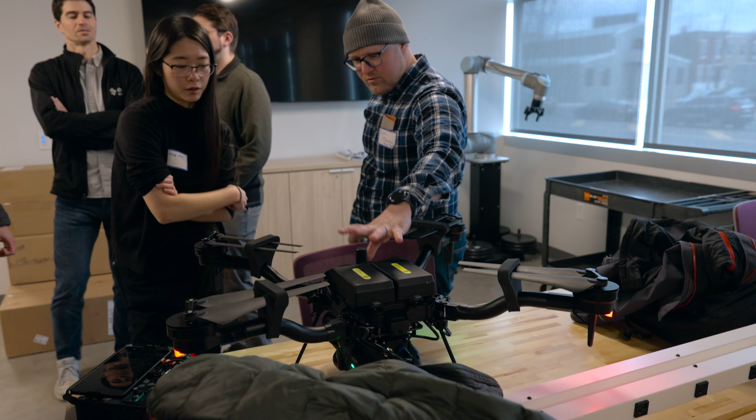My name is Spencer. I'm a PhD student here at the GRASP lab. And today I'm going to give you a brief overview of some of the research I've been doing for my thesis over the past couple of years.

And I'm going to start off my talk, if it goes to the next slide, talking about flying cars, because I think that's an exciting thing. I think a lot of people growing up, they dream to have their own personal flying car. And American pop culture has been obsessed about flying cars for decades now, pretty much since the invention of cars

and airplanes. It's 2025 now, and I didn't check today, but I'm pretty sure we don't have flying cars. But I will say, we've never been closer to having this dream of flying cars and being able to fly from your home to your job in the city and back, no traffic whatsoever.

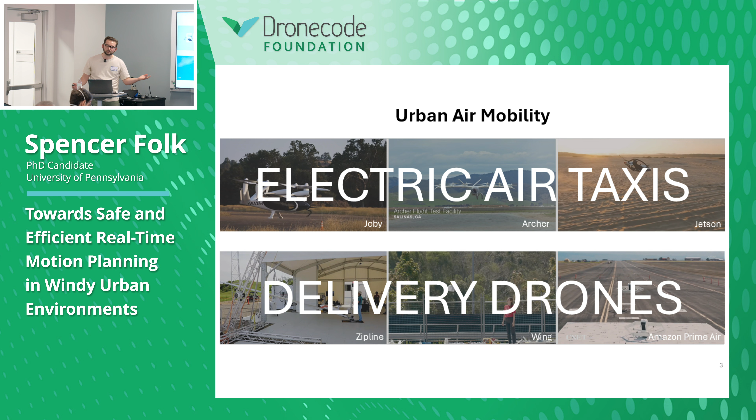We've got a lot of exciting companies that are working on reinventing the helicopter, essentially, developing these personalized aerial vehicles that promise to be quieter, safer, easier to use, etc. On the other side of things, we've got a lot of drone companies that are actually piggybacking off of the success of platforms like PX4 to develop autonomy for package delivery, for instance, flying packages from one location to another.

But I really think that the elephant in the room here, something that's really going to be a problem in the next 10 to 15 years, is urban wind. The fact that you have all of these skyscrapers, buildings, bridges, these bluff bodies that are interacting with the atmospheric boundary layer, is going to create a lot of very complex flows that, frankly, I don't think any urban air mobility or package delivery drone company is trying to attack right now.

And that makes sense. They're just trying to get their prototype in the air. But I think as we try to introduce these prototypes into our nation's airspaces, one of the biggest challenges in my mind is going to be these urban wind phenomena.

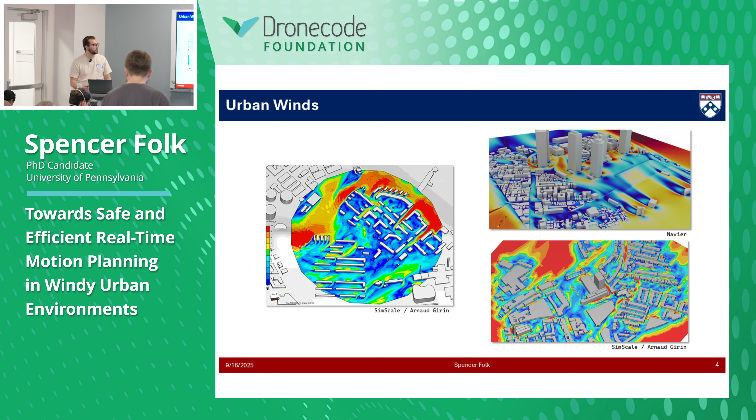So the problem that I'm trying to address with my thesis work is wind. Wind is a clear danger for these autonomous aerial operations in dense urban environments. And I believe that urban air vehicles, in order to be successful and safe, need to be able to perceive the wind and make proactive decisions in order to avoid these dangerous and costly wind conditions.

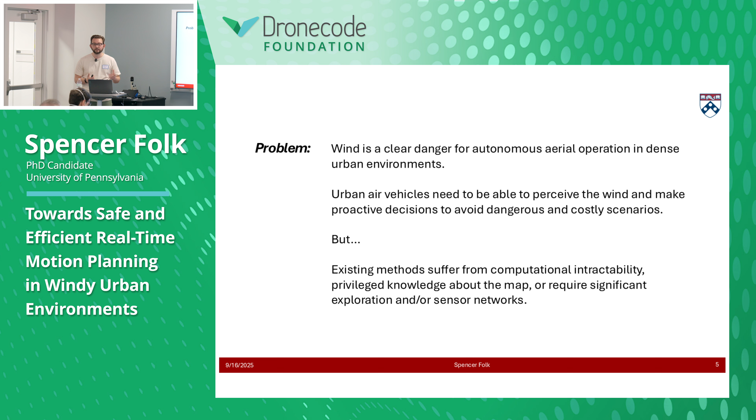However, as I'll show very briefly, a lot of existing methods that try to solve this problem suffer from computational intractability, privileged knowledge about the map, or require significant amounts of exploration and/or sensor infrastructure in order to enable these methods.

So in my talk, I'm going to cover three chapters of my thesis in a way. I'm going to talk about a novel method for local wind prediction using navigational sensors. And then I'll talk about using that enhanced capability and enhanced situational awareness to enable safer and more energy efficient flight through urban environments.

And then last, I'll talk about our progress towards validating some of these ideas on actual hardware platforms. And the main focus with all of my work is developing methods that could, in theory, be applied in real time using onboard sensing. So I'm going to start by talking about some work on local wind prediction.

So the problem is, we've got this very complicated flow phenomena that, as I said, arises as that boundary layer interacts with all of these bluff body buildings in an urban environment. And the question is, how do we put together an accurate model of this flow? Because if we had an accurate prediction of what the wind would look like, that would kind of trivialize the problem in a sense. And so one brute force option is to do something like computational fluid dynamics,

where, this is pretty standard stuff, we're simulating the wind using existing numerical solvers and some sort of precise map of the environment. But this is very computationally expensive, and by the time you finish producing a solution, that solution might be old news. It might be wrong.

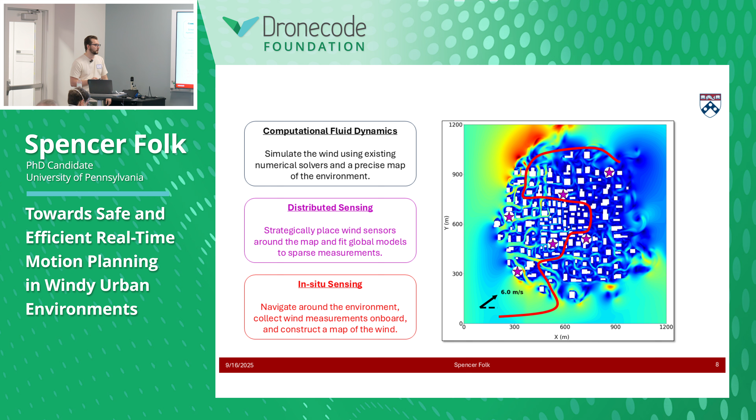So as I said, these existing methods rely on some mix of distributed sensing, in situ measurements from a mobile sensor, or a precise up-to-date map of the environment, which just might not be feasible. So what I'm working on is instead trying to reformulate the problem of predicting the entire flow field down to just predicting a smaller portion of the flow field that is centered at the robot's location. Because to be honest, the most important and most relevant information for flight at a given instant is what is the wind right around me, right? I don't necessarily care what the wind looks like 5 blocks away from me.

And so what we'll do, as I'll talk about in the next slide, is leverage these correlations that we observe between surrounding obstacles or topography signatures and the surrounding local flow field. And then because it's 2025, we're going to use deep learning to model these correlations.

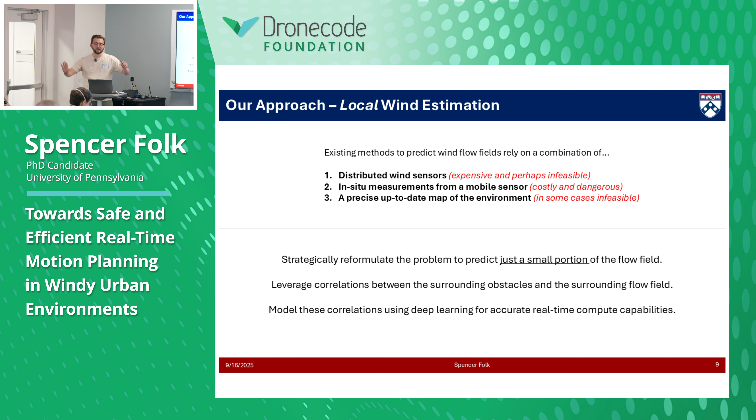Say again? AI. Yep, this is AI-enabled wind flow sensing is what the title should have been.

Okay, so this is a brief overview of our methodology. The inputs to our network are range measurements that you would get from a navigational LiDAR, some of which we've seen here today, and then some measurement of the wind flow field, either at the drone's location, which is this local wind vector, or some upstream wind vector, say from a weather station. This is kind of outdated. We threw out the upstream weather station requirement later because we discovered in an ablation study that it really wasn't providing much information to the network. So we can really just rely on a single measurement of the wind at the drone's location and a LiDAR scan of the environment at that instant.

And this is important to mention, the output of our network is not just a single wind speed vector at the drone's center of mass. That's already been done. What we're doing is outputting a flow field that's ego-centered at the robot at all times. So we're always trying to predict essentially on a grid that moves with the robot. And we're not just getting wind speed, we're getting X and Y components as well. And again, because it's 2025, we use AI to do this.

Now, the benefits of this over some of the other ideas I talked about a few slides ago is that at runtime, this is very computationally inexpensive, especially in the days where we can throw an NVIDIA Orin on any of these platforms. We get a lot of GPU compute, so having a neural network running on these vehicles is really cake. It also generalizes to unseen environments, and I'll explain why that's the case in the way we train these models. And it also requires no knowledge of the map, so you could go into a completely novel environment and have this method still run on board.

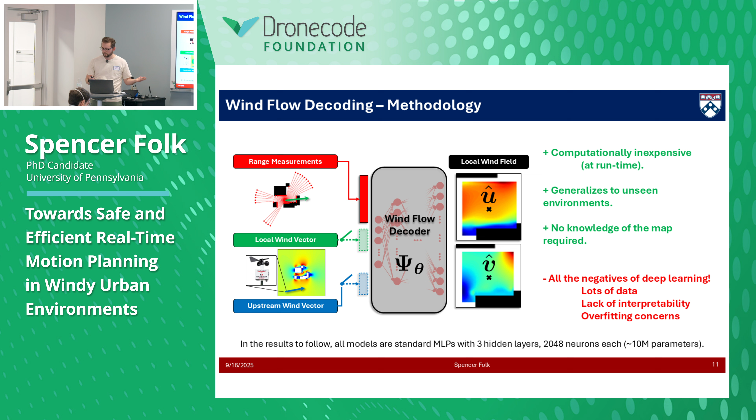As far as the negatives go, it's all of the negatives of deep learning. So we require a lot of data for our method to work. I'm not going to skirt around that. There's an inherent lack of interpretability for our method, and there's definitely concerns with overfitting to a particular map or a particular environment. And we try to do some things to avoid that.

But the way we train these models, again, starts with a lot of data. So we developed our own in-house fast computational fluid dynamics solver that would simulate thousands and thousands of wind flow patterns in completely procedurally generated cities. So this is like thispersondoesnotexist.com, but this city does not exist, right? These are all procedurally generated cities.

And for each of these simulations, we do dense sampling where we randomly position the simulated LiDAR sensor in the environment, collect a LiDAR scan to understand what the local topography looks like, as well as what the local wind and the local flow field look like. And then the rest is just supervised learning, so I'll crunch through that. We use supervised learning to train our models. And then again, we're talking about overfitting. We don't want to overfit our model to particular cities that are in the training data set.

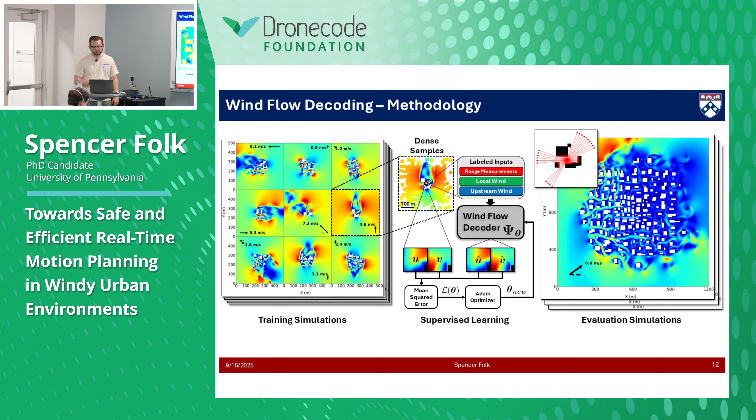So when we evaluate or validate our models, we're testing them on much larger and potentially different city environments that we're using to essentially monitor how the training process is going. And this is a pretty cool GIF of what it looks like for the model to train. So each frame here is a new epoch, or a run through of the entire training data set.

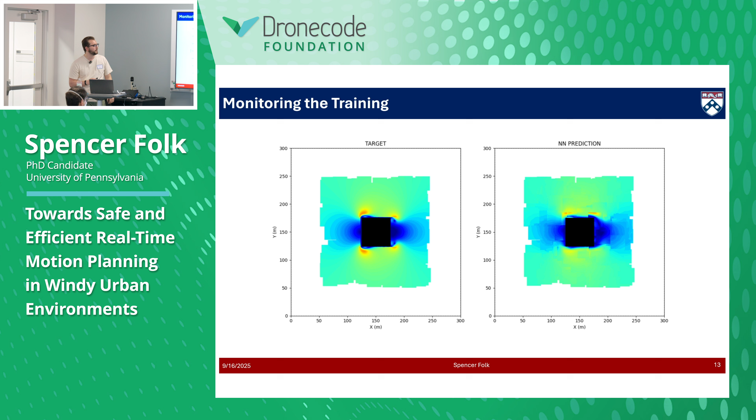And you can see at the very beginning, you just saw it for a frame, it was basically noise. But then it very quickly picks up on different symmetries of the flow. So again, this is flow coming left to right over a single building. And you can see that first it picks up on symmetries in the flow, and then it narrows in on some finer details like the corner accelerations as the flow wraps around the building.

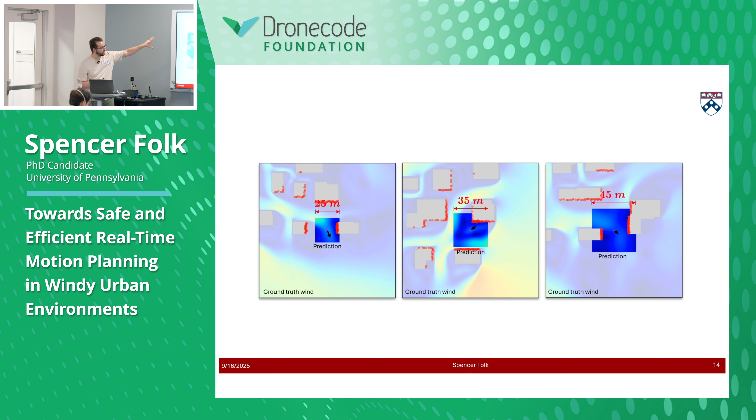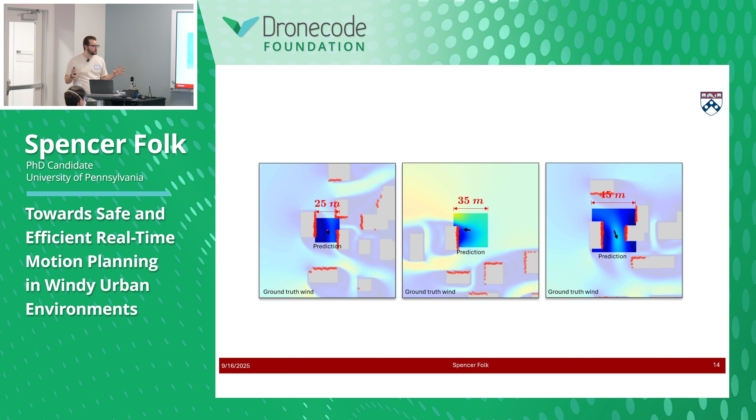And what we get out of this is a network. Here I'm showing 3 separate networks, each trained to predict a different size environment, that again is predicting the wind flow field, which you're seeing here in the small box in the center of each GIF, using only LiDAR sensing and local measurements. So that's the key innovation: we don't know anything about the environment going in. All we get is topography signatures from these red dots, which are LiDAR scans, and single measurements of the wind at the drone's location. And feasibly, this could be run in real time using existing compute resources. So that's our method for predicting the wind.

And now I'm going one step further and saying, how can we use this enhanced situational awareness to actually improve the safety and efficiency of these drone operations? So the problem is, again, I present you with another situation where you've got this nasty, complicated flow field that you're trying to navigate from point A to point B. And I'm proposing that you don't know what that environment looks like. Maybe it's a hostile environment. Maybe your Google Maps is outdated, but you don't know what that environment looks like, and you don't know what the wind flow field looks like.

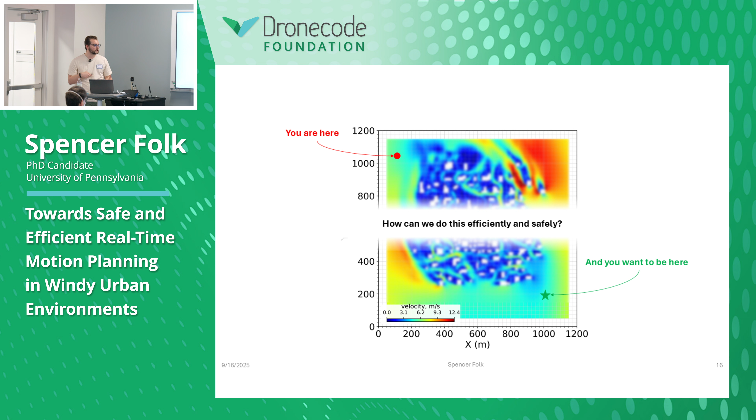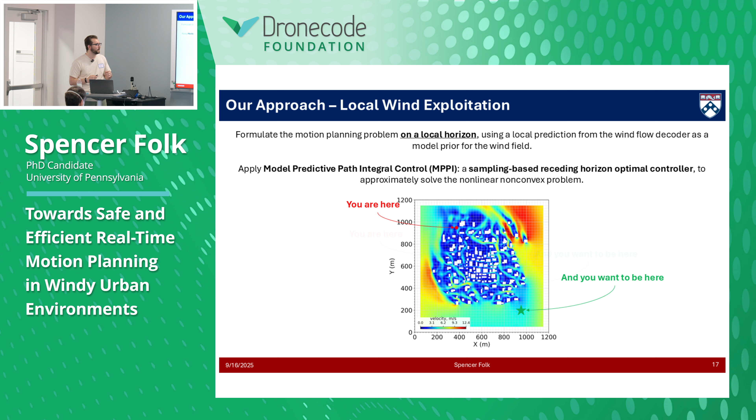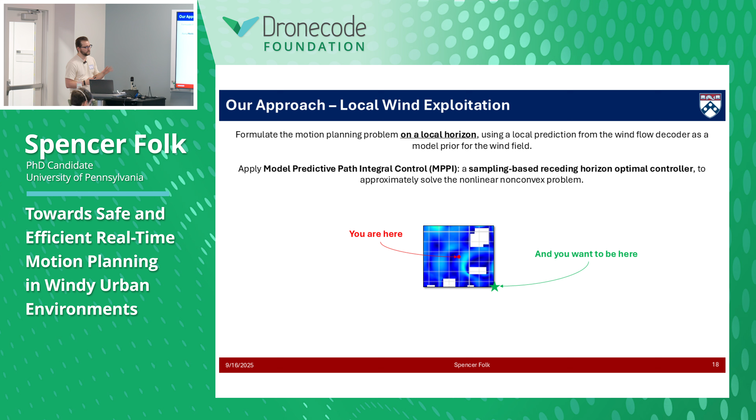So the question that I'm trying to address with this particular work is, how can we do this efficiently and safely? And so once again, in the same spirit as the first section of this talk, reformulating the problem from a global prediction to a local prediction, we are reformulating the problem from a global nonlinear trajectory optimization problem down to just a local trajectory optimization problem. This is still a very nonlinear, non-convex, nasty problem that is difficult to solve with off-the-shelf solvers. But we're able to leverage the fact that we have this new ability to predict the wind in this small box.

And this is an overview of our methodology. Essentially, we take a LiDAR scan and we feed it into this wind prediction module. And then once again, that gives us the flow vector field components in some box around the drone at all times. And we feed both the LiDAR scan and the wind prediction into a model predictive path integral controller, which is just a receding horizon MPC style control scheme that produces a higher level thrust vector command. And then that could be piped into whatever lower level controller, including PX4, that you have in order to get the control allocation to track that command as best as possible.

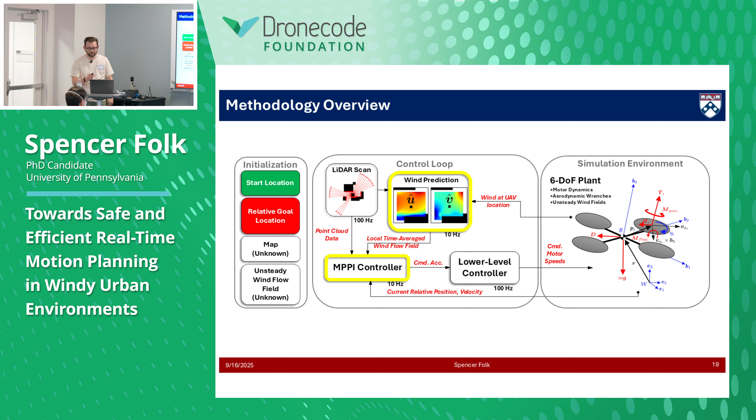But essentially the way we initialize our algorithm is we just give it a start location and some relative goal location, like navigate 100 meters downrange. And then we don't require knowledge about the map or any unsteady wind flow field. I want to highlight that on the right here, the simulated results that we generate are in a custom in-house simulator that we have in Python that simulates the full 6 degree of freedom plant of the model, including motor dynamics, aerodynamic wrenches, unsteady wind flow fields. So while I'm showing 2D results, and it is operating at a constant altitude, we are using a full 6 degree of freedom plant to generate these results.

And so you see 2 drones here. The magenta drone is just interested in getting from start to goal. It has no knowledge of the environment.

The black drone in this environment is aware of the flow field in the background, but only within that box around the drone, right? So it doesn't have any knowledge of what the wind looks like around it. And again, I'm using a sort of sampling-based receding horizon controller.

So at every time instance, it's essentially sampling a bunch of admissible control inputs, possible thrust vectors, over some time horizon, say like a minute into the future. And it uses those sampled inputs and a dynamics model to predict where the drone goes in that time horizon. And then it takes the next best action that minimizes some sort of cost function.

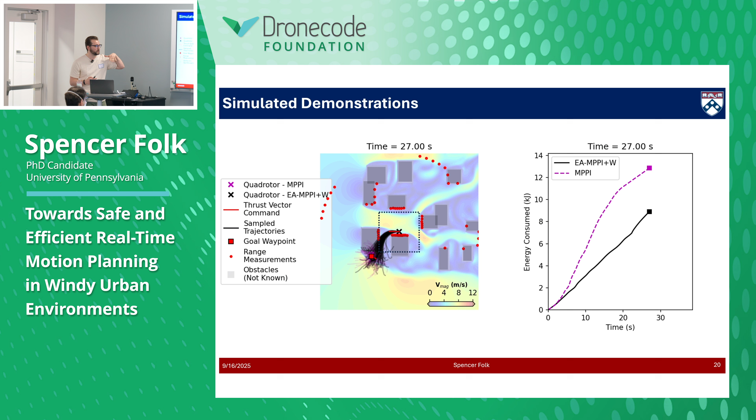And I just don't really have time to talk about what that cost function looks like today. But I'm happy to discuss details at a later date. On the right, you can see the energy consumption as a function of time. And you can see that the energy aware drone, the black line, consistently uses less energy over time.

We did some case studies, and we actually compared our method to a globally optimal graph search algorithm that's pretty popular in this literature. And so we did kind of canonical examples of flow around buildings, around an isolated building, an intersection environment, and then one of our evaluation maps. And I just want to zoom in on this.

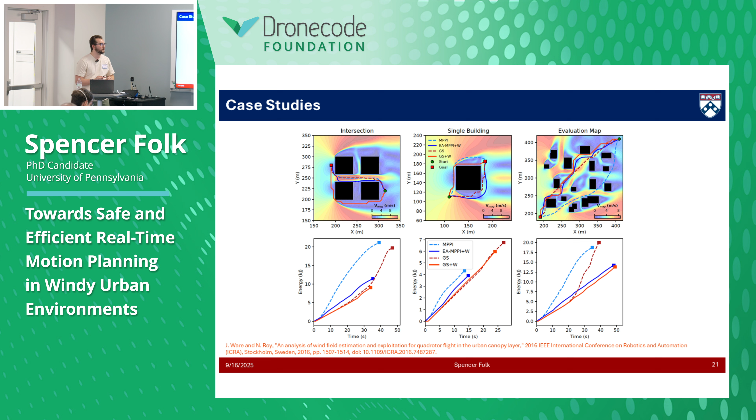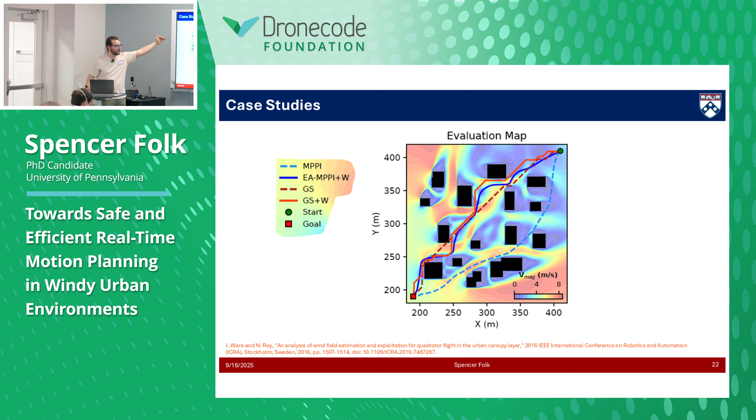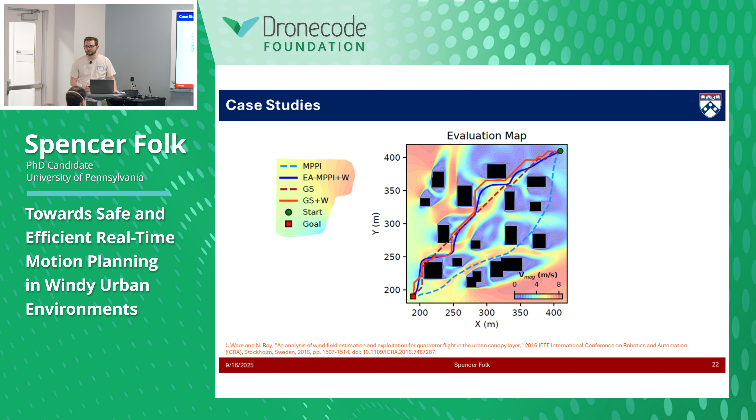So the orange lines here are the globally optimal solution. And the blue lines here, especially the blue solid line, is our local approximation of that solution. And so what we see in a lot of cases, not every case, but in a lot of cases, we get very similar paths traced out by our local optimizer that can, in theory, run in real time, versus the orange line, which takes 3 hours to run, right? Because it kind of checks every possible option over and over again. So that was all simulated stuff.

I want to now shift gears to talk about our more recent efforts to validate some of these ideas on actual hardware platforms. And for this, we're going to transport ourselves all the way from Pennovation, which is where we're currently at, to NASA's Ames Research Center, which is in Silicon Valley in California. And the reason for that will be apparent in the next slide.

But we're planning this set of experiments that unfortunately I don't have many results to show today, but we're essentially planning to simulate these urban wind flow fields using an open-air wind tunnel, which you can see on the left side of the screen, and essentially a scaled-down mock city-style environment. And because we're kind of limited in terms of the size of the wind tunnel that we can operate in, we're choosing to use a platform like the Crazyflie.

But again, my algorithm is agnostic to whatever platform you have. It outputs a thrust vector command. Whatever drone you have that can track that thrust vector command is sufficient in my mind. But the reason we're doing these small scale environments is mostly to guarantee some level of verification, repeatability, accuracy, and interpretability of the system.

So another option is I could take my drone, like the Falcon 4, for instance, that's in the other room, and I could fly it around Pennovation, but I really wouldn't have a lot of confidence in the ground truth measurements of the wind that I'm getting. So by doing things in this small scaled environment where we can let it run for hours and hours, we can collect very fine scaled, accurate measurements of the flow field and use that as a more accurate ground truth that we can use to compare the performance of our algorithm over other algorithms.

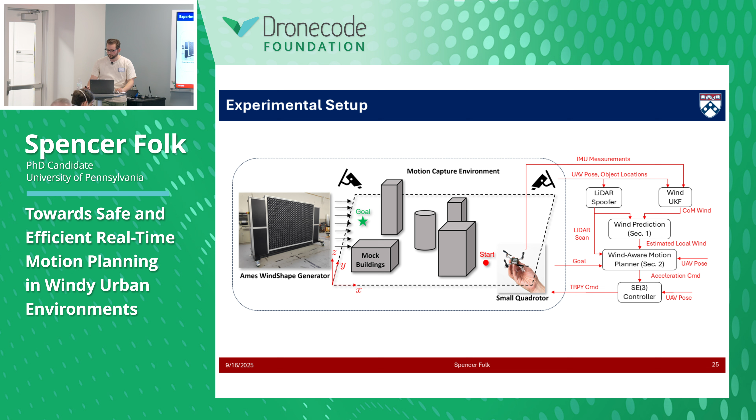So again, the reason I'm going 3,000 miles away to do this is to use a really unique facility that we're currently building up at Ames. This is also half a shameless plug, I guess, or maybe an advertisement for this facility. I know that a lot of us here are on the East Coast, but my mentor at NASA that's building up this lab facility is building it with the intent of getting a lot of people involved in this space. This is outside of the main gate for NASA, so you don't need any special clearances, but you can come, bring your drone and do some free flight testing to assess your drone in a variety of different windy conditions.

So this is about a 9 by 6 foot area, open air wind tunnel, and it's situated pretty much in the center of a basketball-sized court motion capture area. Which is very unique. You don't see many motion capture areas in the US that are that big.

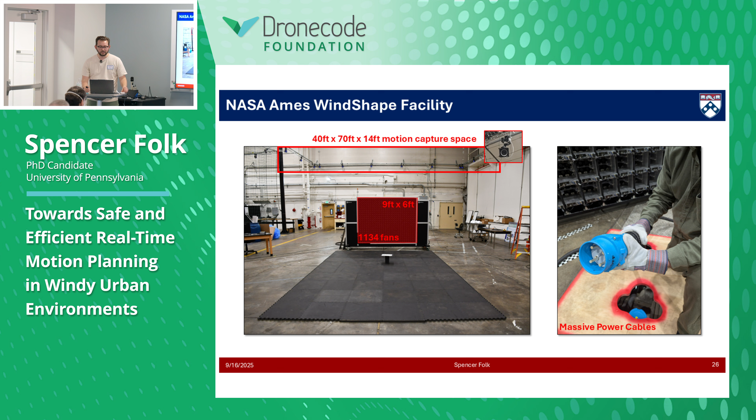So what this enables you to do is, for instance, for my research, set up these scaled city environments and again, run these kind of repeatable tests over and over again. So this is an example of the kind of things you can do. This is, again, a Crazyflie.

What we're doing is hovering the drone and subjecting it to faster and faster wind. I think it should pop up here in just a second, but if you can believe it, this 30-gram drone can fly at easily 10 meters per second. Yeah, so it's essentially flying at 10 meters per second, which is just kind of wild to me that it can do that. But the reason we're doing this is essentially we're treating it as a wind tunnel, right?

All of these drones are equipped with accelerometers, which are essentially ways to measure the drag forces and thrust forces that each drone is producing. And so we can use that acceleration data to fit models of power consumption and drag forces, et cetera. So one of the cool things that I worked on with these first set of experiments is trying to understand the power consumption of a drone like a Crazyflie as a function of airspeed.

So if you look at a helicopter textbook, oftentimes you'll get curves like this for full-scale helicopters, where on the y-axis you have the power required to fly, and on the x-axis you get airspeed, essentially how fast it's flying. And for full-scale helicopters, you get some of these really neat effects where the total power required to fly actually dips for a certain speed. There's essentially a range of optimal speeds that helicopters can fly at.

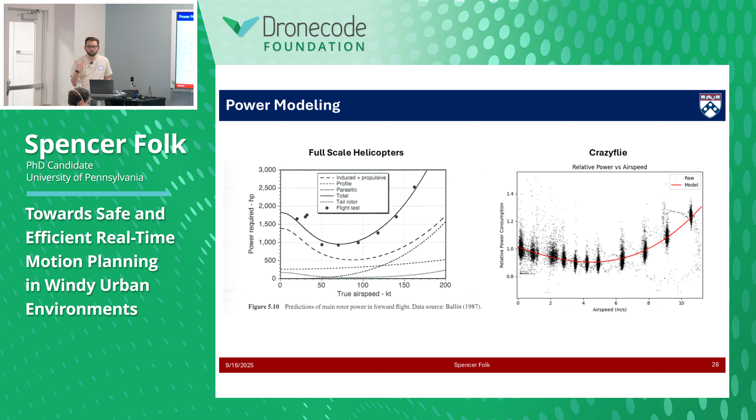The other cool thing that we can do is wind estimation. This is not a new topic or a new concept. In fact, PX4 has a wind estimator that you can use off the shelf. But the idea is these drones are equipped with accelerometers. Those accelerometers measure the drag force on the vehicle. And if you have a good mapping from drag force to airspeed, and you know what the ground speed is, you can essentially isolate what component of the drag force that you're sensing is due to wind. So instead of having a dedicated wind sensor on the drone itself, the drone can be the wind sensor.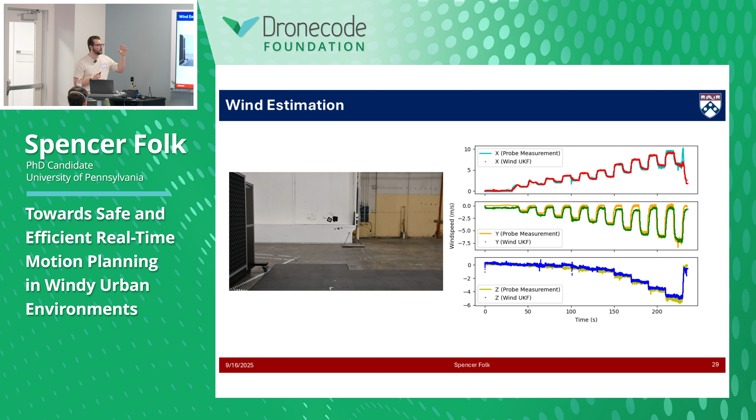And again, that's not a new concept, I think, for most people, but I wanted to point out that we can kind of easily, rapidly construct these very accurate model-based wind estimation schemes, and we can verify them because we've got this laboratory-controlled environment where we can test our vehicle in free flight, right? We're not putting it on a sting, and we're capturing all of the effects of the rotors affecting the frame, et cetera. So that's one component that I've been working on, getting a robust, model-based wind estimation scheme up and running on the Crazyflie.

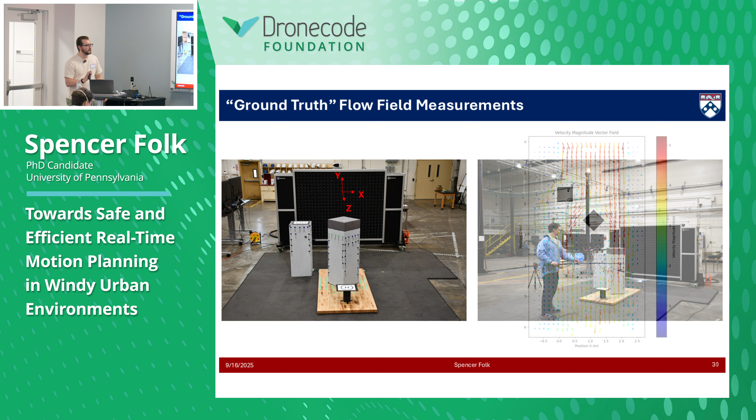So again, one big selling point of these hardware experiments is we're going to have verifiable, repeatable measurements that we can get in this open-air wind tunnel. And so this is just an example of the kind of city-like environments that we have. And on the right, you'll see somebody that's not me, but maybe me if I stuck to a diet and a workout routine, carrying an airspeed probe that can scan the environment and collect wind measurements all around the scene. And the result of that is a pretty accurate measurement of what the flow field looks like.

This is not what you're going to get outside, because if I'm flying a drone, by the time I scan an environment with a wind sensor, that wind pattern has already left, right? The wind now looks fundamentally different than what it did half an hour ago. So having this repeatability is just going to be really valuable for producing these kind of experiments and really valuable data for characterizing the performance of these systems.

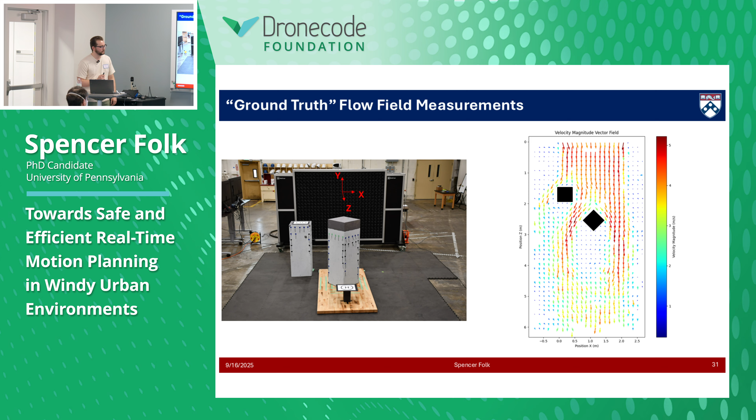Another thing I wanted to highlight is, we're using a Crazyflie. It's a really small drone. There's no way you're going to be able to fit any LiDAR sensor on this drone, right? And of course, my algorithm requires LiDAR in order to sense the surrounding geometry. So what a lab mate and I did was we essentially recognized that we're operating in a motion capture space. We know where the drone is. We know where the obstacles are in the environment. So why don't we just spoof the LiDAR using raycasting? So that's what we did.

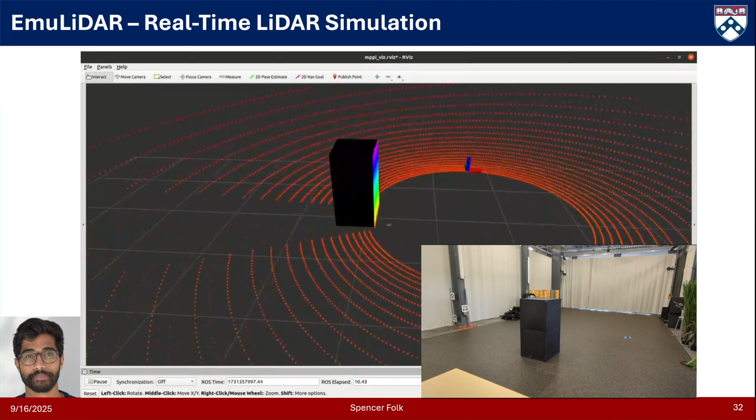So this is something that we're hoping to release soon that we think would be a valuable tool, particularly in education, but maybe somebody in the room thinks they might find some use out of it. But it's essentially a ROS package that uses measurements of pose of both the drone and the environment to simulate a LiDAR at a very high frequency. So you can change all of the intrinsics of the LiDAR to match your hardware platform, or you can test how your algorithm degrades as you lose more and more information from that.

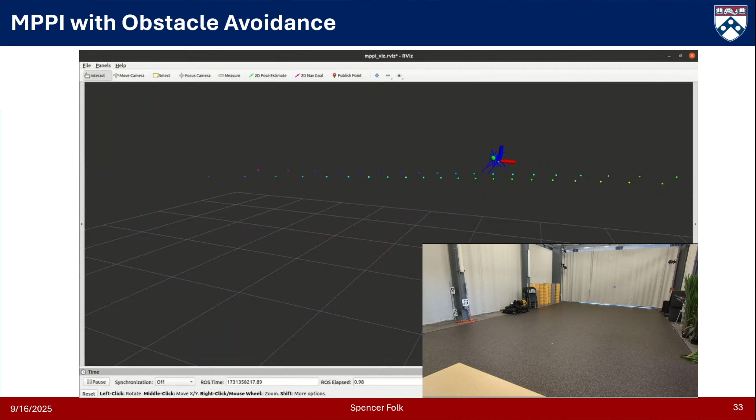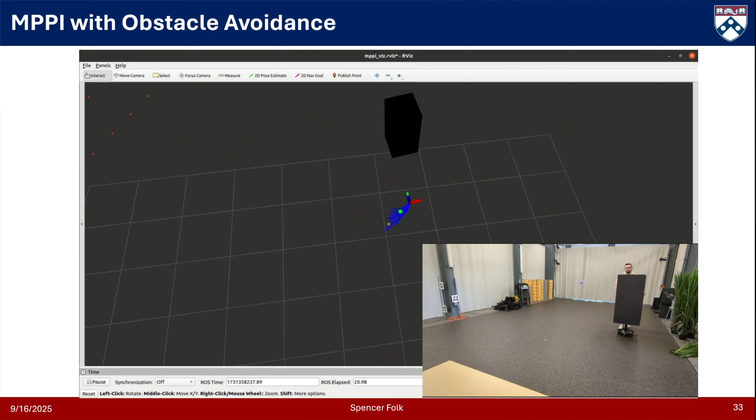But I did want to prove to you that we can get this receding horizon MPPI controller working in real time. One of the biggest issues with MPPI is that it's not real-time capable, but I just wanted to demonstrate to you that we are working on a real-time capable version of this receding horizon controller. It looks a little bit different than the simulated results that I showed you.

Here, that drone is tracking this green dot, and I am moving this obstacle, this dynamic obstacle, through the environment in its way, and it's able to adjust using that fake LiDAR measurement that I had in the previous slide in order to detect that obstacle in real time and adjust its path to avoid that obstacle.

The key takeaways that I think are interesting to have from this conversation is, number one, these local wind flows are correlated with local building geometry because of the kind of boundary conditions that they impose. We're assuming that wind can't flow through these skyscrapers and it must flow around the skyscrapers. So if we can measure these boundary conditions, which we can using LiDAR and a single measurement of the wind at the drone's location, we should be able to exploit that to produce prediction of the wind in a region around the drone and not just at the drone's current location.

The second takeaway is that motion planning in these complex urban wind flow fields can, in most cases, be decomposed into these smaller local problems that are more computationally tractable to solve. And then the third key takeaway is that, again, this is not necessarily a new topic, but because of the existence of the drag forces on these vehicles, we can treat the UAV as a sensor. We don't necessarily need dedicated wind sensing on these UAVs.